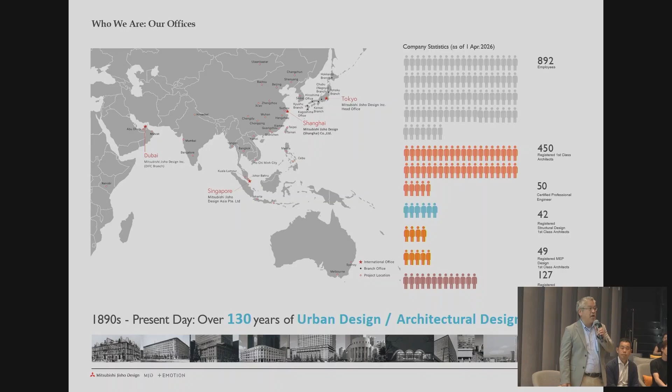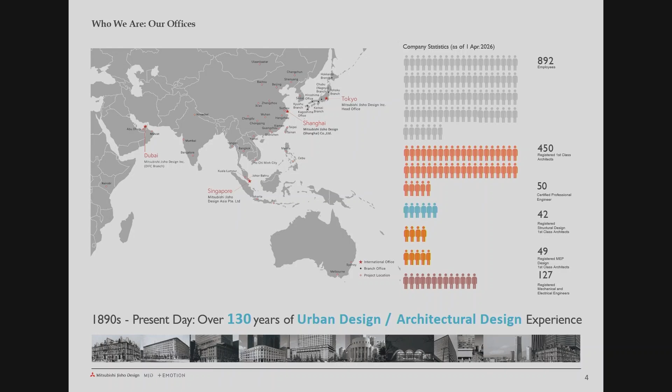And what we do—here are our statistics. We have a little less than 900 staff, and about half are architects. We have all the engineers and consultants, so we do all types of architectural design and engineering design tasks. And these are some of the projects that we do.

We were founded back in the 1890s, more than 130 years ago. As they also mentioned, the area in front of Tokyo Station is called the Marunouchi area, and that's the CBD of Tokyo. Our mother company, Mitsubishi, bought this 120-hectare land to develop the first CBD in Japan. We invited an architect from Britain, since Japan didn't have any architects at that time, and we learned from the British architect to create London-style brick buildings. Then, in the early 1900s, we started building reinforced concrete buildings as well.

There were several phases of redevelopment in the Marunouchi area, and today we are actually working on a tower about 400 meters tall, which is expected to be completed in 2029.

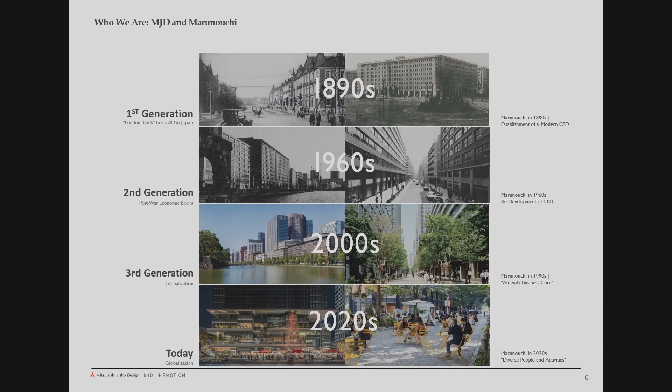So why? It is because we started out as Mitsubishi Jisho Design, one company. We designed brick buildings, reinforced concrete buildings, steel buildings, and all those. But given the current situation of climate change, we are trying to explore other methods to reduce carbon emissions. One of the answers we are seeking is timber structures—the use of wood in buildings. Mr. Hotta will talk about the actual implementation of timber structural design.

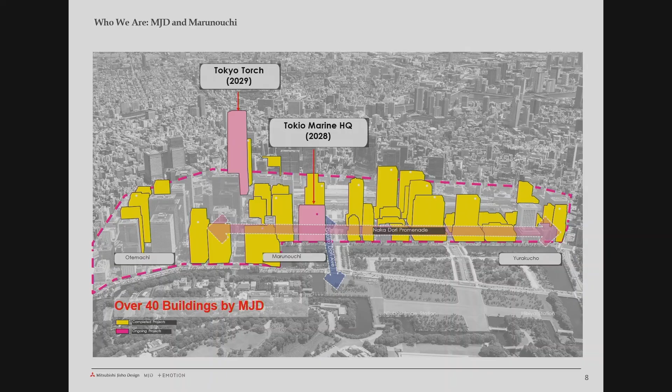That's one of the biggest projects we are working on. On the other hand, Mr. ATSUMI will talk about a smaller scale project, the tea house you see downstairs, looking at the potential of other implementations of wood as a material. Now I'll hand it over to Mr. Hotta for the structural design.

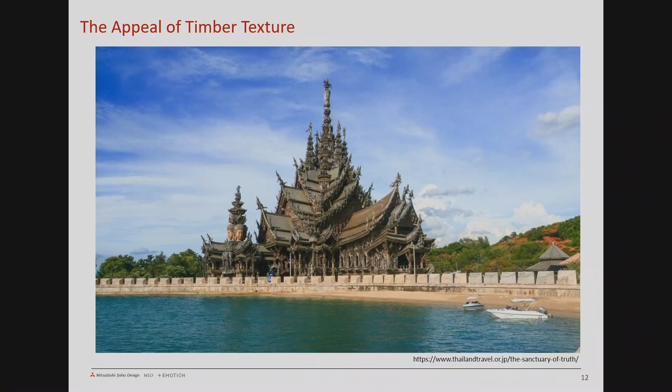For both Thai people and Japanese people, I feel timber is a very familiar material. Looking at Thai traditional buildings, many buildings use timber, and sometimes the timber creates a very artistic appearance.

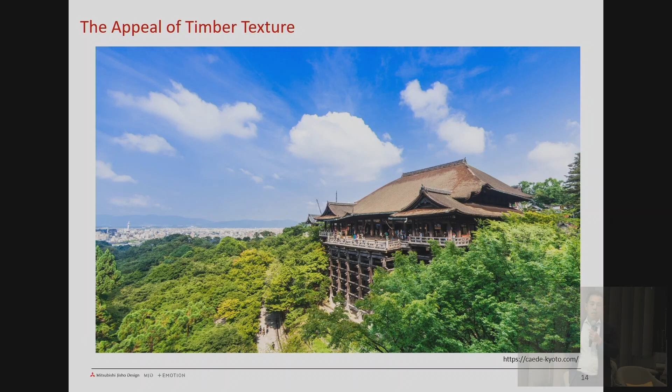I think both Thai people and Japanese people feel timber structures have a heartwarming appearance, and sometimes it's very easy to make an artistic appearance with it.

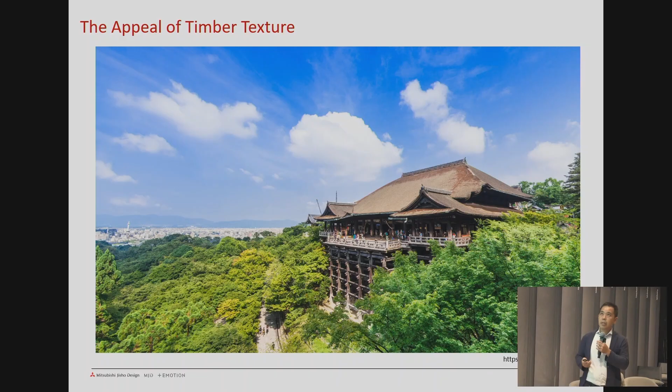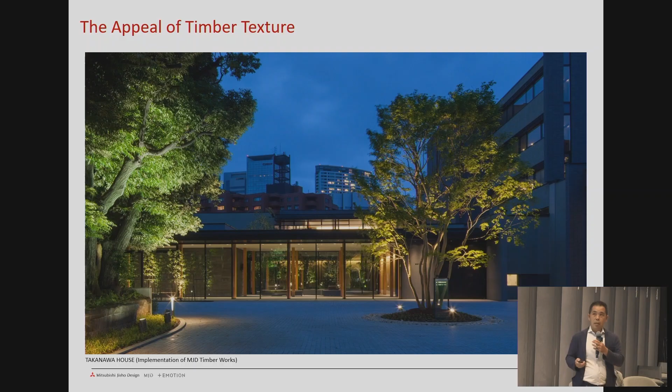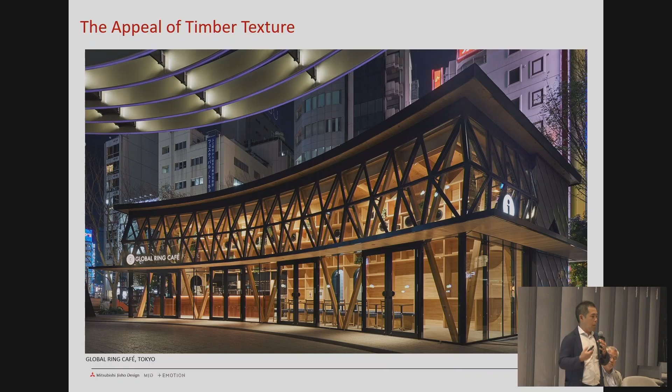Even looking at modern Japanese timber buildings, this is actually my first timber work in my career. This kind of heartwarming or warm appearance and texture is very well accepted by clients. And this is another project we've worked on for more than 10 years. This heartwarming appearance is one of the motivations to adopt timber structure.

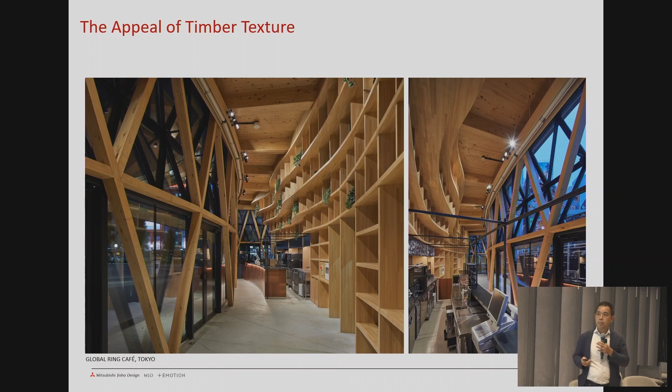This is the interior of a cafe, around 100 square meters, where people enjoy coffee or tea inside, feeling a very mature mood. And this is another one of our projects, collaborating with architect Kengo Kuma.

Even modern timber structure can express a very artistic appearance, as well as traditional sculptural architecture.

But today we would like to think about why timber structure is trending all over the world now. Except for Japanese or Taiwanese people, timber is not always a traditionally familiar material. However, nowadays, all over the world, people are very interested in timber.

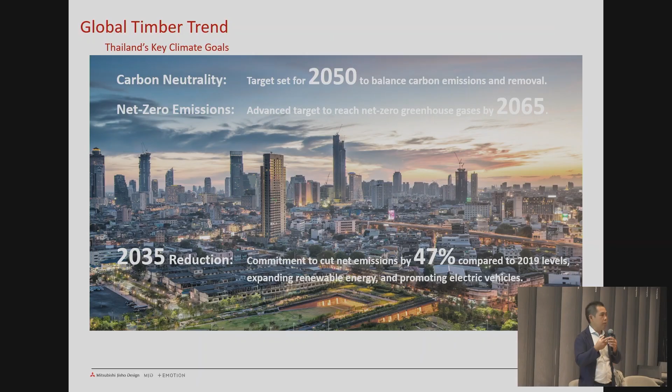One of the reasons is the current trend around timber - for instance, this is Thailand government's goal for the 2050s. All people are now very concerned about global warming, so we need to reduce carbon emissions and prevent further global warming. So we are looking for good materials to construct buildings now.

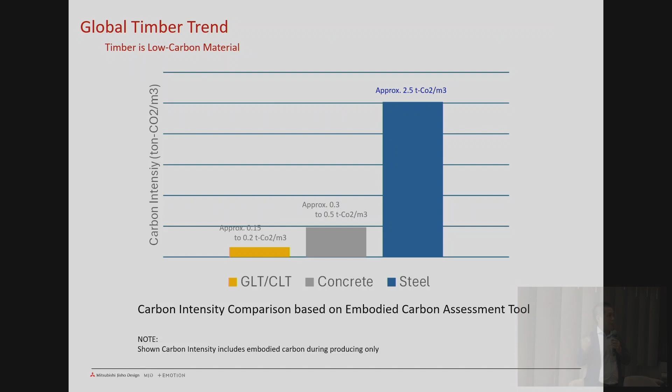Comparing the carbon intensity between timber, concrete, and steel - this is carbon intensity data from a website. Steel exhausts so much carbon during its production. However, timber, even glulam timber or CLT, has much smaller carbon intensity compared to concrete and steel. That's why people are very interested in utilizing timber.

Another aspect is that timber can absorb CO2 in the air during its growing. After 30 or 50 years after planting, trees stop absorbing CO2 and start using oxygen rather than absorbing CO2.

However, that grown timber is shipped to the city and changed into a timber building, and new trees are planted in the forest, creating a sustainable forest. This means the city can stock carbon, and we can create unlimited CO2 absorption in the forest. That's why people are interested in using timber as much as possible.

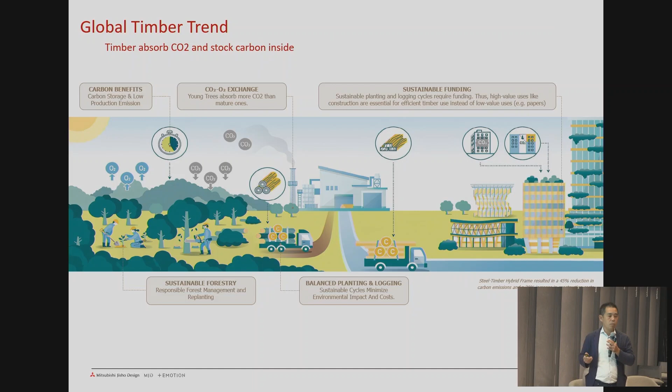But in this scheme, sustainable forest circulation is essential. In any case, based on this concept, for the past 10 to 15 years, people have been very keen on creating timber buildings as big as possible.

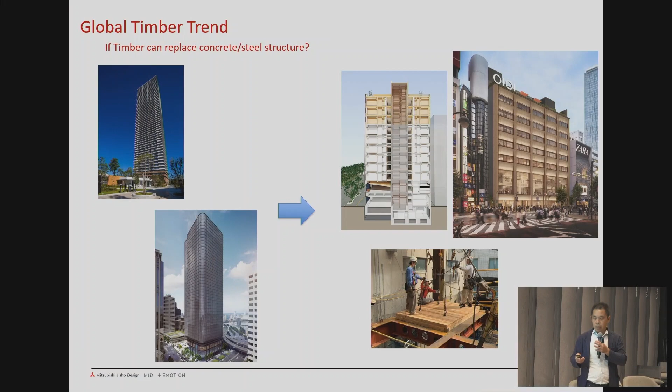Previously, all buildings were constructed using concrete or steel, but by trying to replace concrete or steel with timber, we can reduce carbon emissions in the city. This kind of motivation has created a mass timber competition all over the world.

A few years ago, I created a ranking of tall timber buildings in the world. Currently the tallest mass timber building reaches approximately 200 meters tall, which is a project in Australia, a concrete-timber hybrid structure. Some mass timber projects are provided by our company.

I'm now working on one under construction, a steel-timber hybrid structure, expected to be the tallest timber-steel hybrid structure in Japan when completed. Anyway, this kind of seeking for green materials is inviting this mass timber competition.

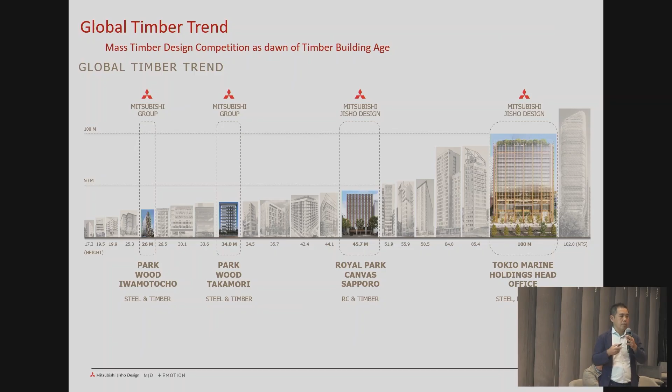And currently, there are so many tall timber buildings in the world.

When we design this kind of mass timber structure, there are three topics to discuss. The first is how we maintain structural stability. Timber is a combustible material, so how do we maintain fire safety under fire. Also, timber is an organic material, so after construction it starts to decay - how do we maintain the quality of the timber? That is the durability and maintenance regime issue.

For structural stability, recently this kind of engineered wood has been well developed. For instance, CLT (cross-laminated timber), glulam timber, or laminated veneer lumbers can provide very strong material properties. This material development makes tall mass timber buildings possible. So in order to maintain structural stability, we positively use this engineered wood. That is the solution of the recent trend.

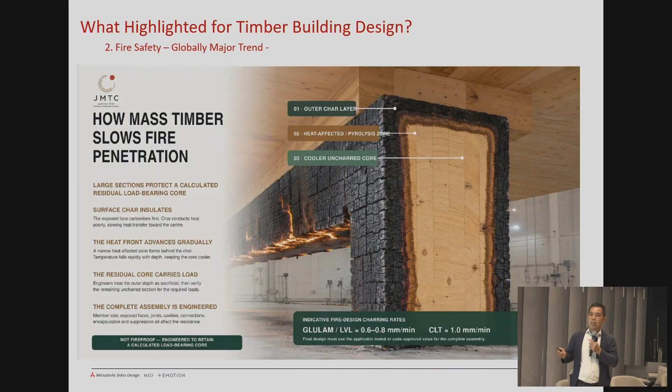For the second issue, fire safety - even though timber gets ignited by fire, it's very hard to keep burning. Once timber gets a char layer, the heat release rate decreases. So considering this char layer and maintaining the fine section until firefighters extinguish the fire, the building can keep its stability. This is an international trend considering char layer design, and most timber high-rise projects accept this kind of char layer design when creating mass timber projects.

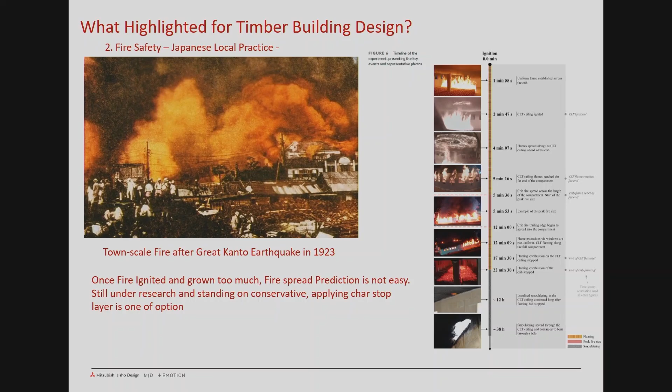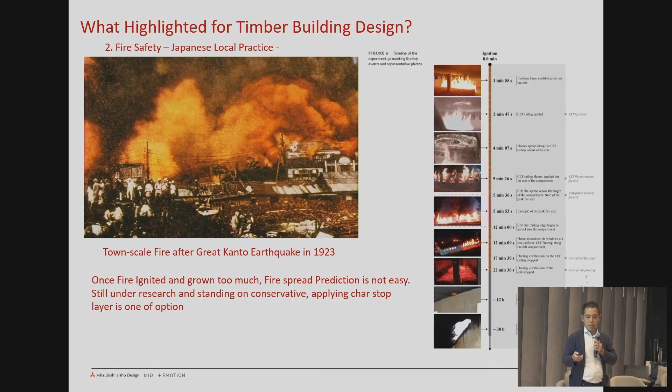Also, when the timber volume exceeds some limit, the growth of fire is very fast. So for the near future, maybe we need to take care of fire safety more, and some additional research or development would be required for fire safety. However, we also need to think about this kind of large fire.

For that issue, a Japanese timber manufacturer is developing a new kind of fireproofing wood. Adopting this fireproofing wood could be one of the solutions for mass timber. The component of the fireproofing wood is a structural section surrounded by plasterboard, with another finish layer applied on the plasterboard. Even though under fire this layer burns out, the plasterboard can stop the development of the fire. Then after 2 hours of heating, the inside is 100% fine.

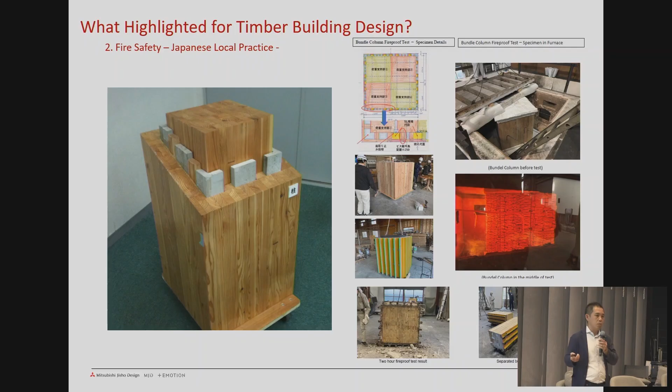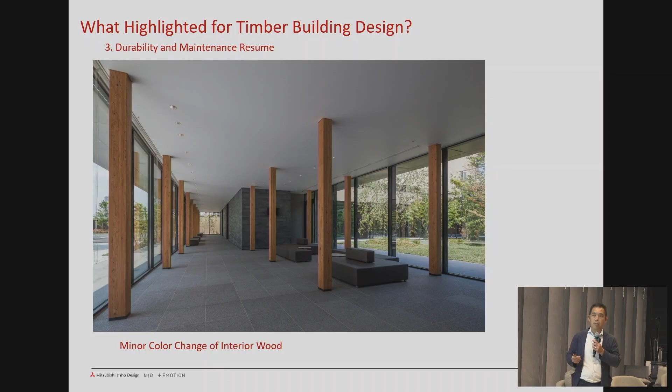Fire safety still needs further discussion. However, depending on the situation of the building and the timber volumes, we already have some solutions. As for durability, as far as timber is inside the building - this is our project, and the picture is taken 10 years after building completion - there is minor color change and no cracking. So as far as timber is used inside the building, we don't need to be too concerned.

However, once timber is exposed to the outside, meaning getting rain or strong sunshine, it easily changes color and sometimes cracks. So if we design a mass timber building in Thailand, we also need to take care of this durability issue. But so far, thanks to the trend of mass timber construction, this research is well developed and a lot of know-how has been accumulated around the world.

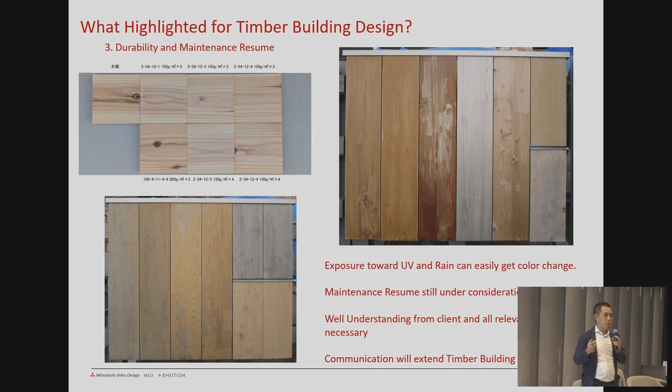Based on this new knowledge, I would like to introduce one mass timber project in Japan. The project introduced today is a mass timber building 100 meters tall, expected to be the tallest in Japan. This building is for an insurance company's headquarters, facing the Imperial Palace and located just in front of Tokyo Station. Currently, the timber erection has just started and it's expected to be completed in 2028.

This building's typical floor plan has a 12-meter distance between columns, with a maximum of 16.4 meters between columns. The overall plan shape is 80 meters by 80 meters, with a patio at the center of the plan.

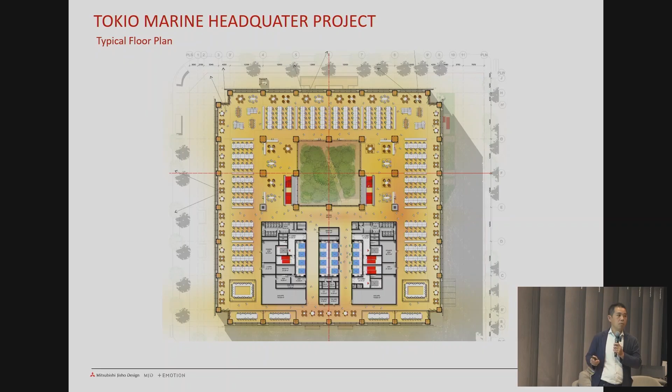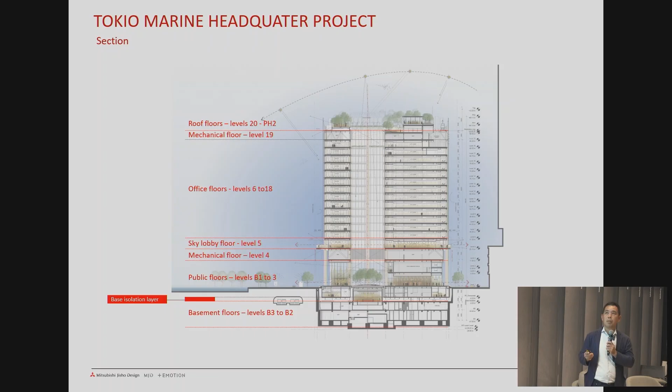The building height is 100 meters above grade with 20 stories. The occupancy is mainly the headquarters of an insurance company, with offices located from level 6 through level 18. Timber is adapted for the columns and some ceilings, with timber columns located above level 6, and CLT appearing as ceiling at the perimeter of the typical floor from level 6 to level 18.

For a typical floor, we have 52 columns. However, 40 of the 52 columns are designed using timber. So timber is carrying very heavy gravity load during the building's lifetime, and we needed to figure out how to maintain structural stability over that time.

This was to figure out the section size of the timber columns. We ran some structural tests, measuring the strength and behavior, and finally reached a design for these columns with 900 by 900 square millimeters to a maximum of 2060 by 2060 square millimeters.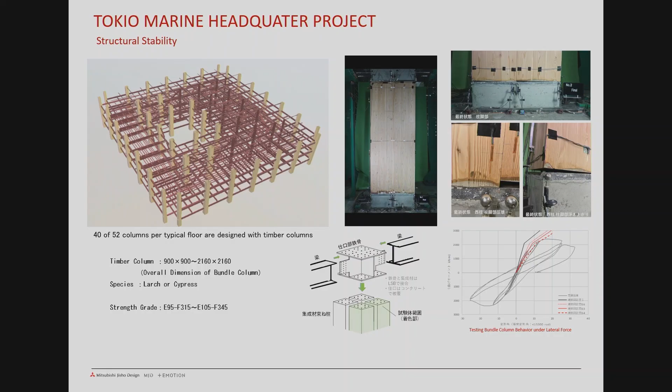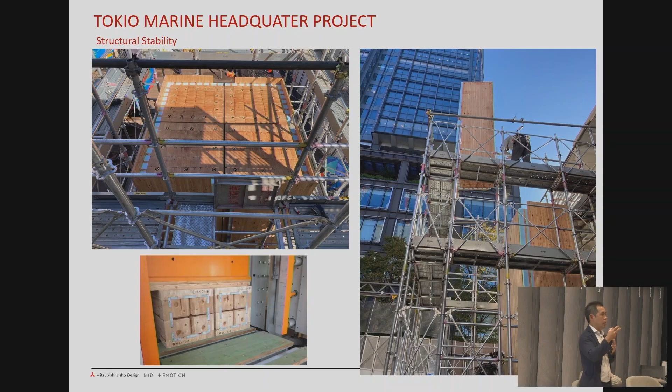However, when the timber section is over 1 meter by 1 meter, it's very hard to produce. So the timber column is actually divided into 4 pieces and bundled on site, like this. Each column piece has this size, so bundling 4 columns into 1 achieves a column of over 2 meters by 2 meters square.

The second issue is fire safety. For this, we also tested some fire igniting tests, expecting a sprinkler effect. The CLT is located at the perimeter of the buildings, but keeping the high ceiling height and testing the sprinkler effect, we confirmed safety during people's evacuation.

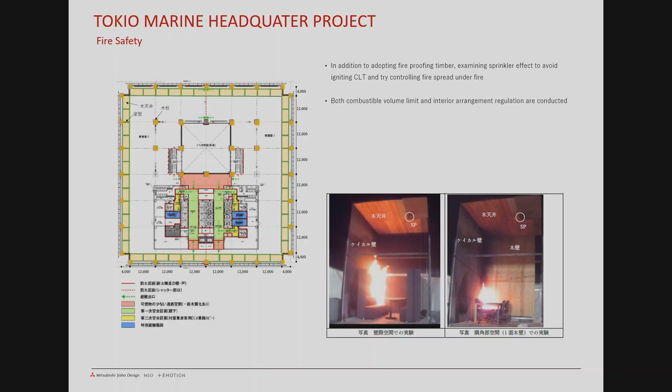Based on our calculation, people on this floor can egress from the floor in no more than 6 minutes. During those 6 minutes, we prevent the fire from reaching the ceiling, even though we have combustible walls or columns located nearby the ceilings.

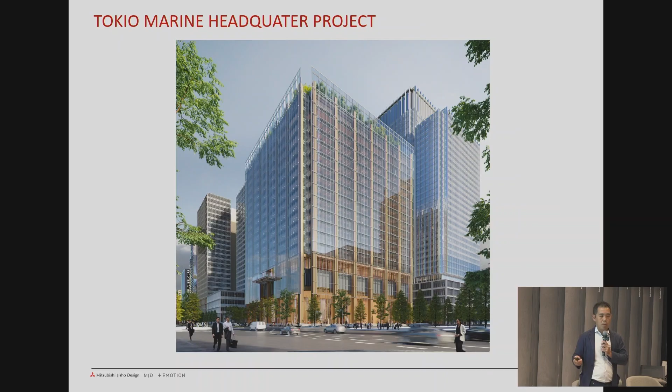As for durability, as you can see in this rendering, some timber is exposed to the air. But this is a very strong design concept provided by architect Renzo Piano. So we thought about how to keep this appearance during the building's lifetime, and the conclusion is...

We provide them some detachable cladding layer. So during the building lifetime, the structural timber is covered with a timber clad, and we also tested some treatment for this timber clad. However, even if this protective layer is decayed, we can replace the clad and change it to a new one, keeping the appearance if the client requires.

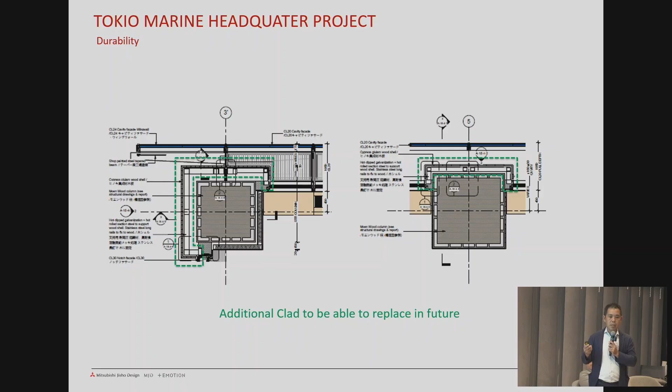But anyway, designing with mass timber is kind of the trend now. However, to design mass timber buildings, we have some issues to solve, and in any case, we have some solutions, as I introduced today. Finally, the building shows this kind of interior.

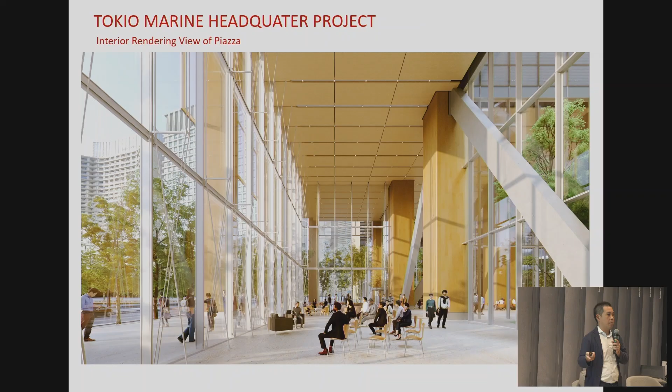So far, I feel the first trend of mass timber is almost terminated, and many engineers and architects are moving on to the next steps. The phase one challenge was how big or how attractive a timber structure we could design. However, the initial concept to adopt timber was about how we design ecological buildings.

So this is some quick calculation of the embodied carbon, comparing a pure steel structure assumption to a timber-steel hybrid assumption. As you can see, this is the embodied carbon per square meter for the Tokio Marine project. The higher the building goes, the efficiency slightly changes.

The lower one is a mid-rise timber-steel hybrid building for commercial buildings. For these buildings, assuming a pure steel structure, the structure shows around 550 kilogram CO2 per square meter. Then some steel columns and steel beams are replaced by timber, and the overall embodied carbon is reduced to 430, showing a 20% embodied carbon reduction.

However, when the building scale is larger, we gave up adopting timber beams, so in this case only a 7% embodied carbon reduction is provided. For future timber structures, we need to find out what is the appropriate planning and appropriate scale to adopt mass timber.

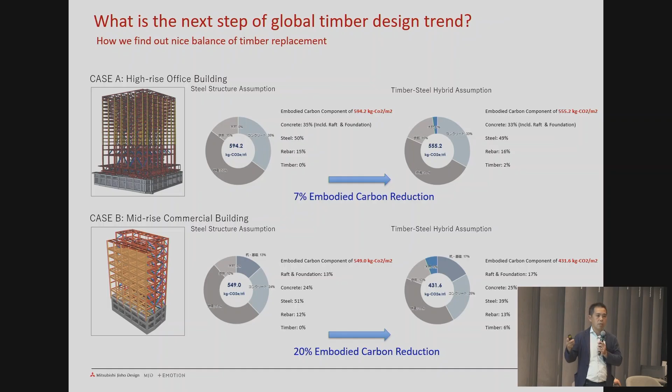So I think maybe by 2028, 2029, many mass timber tall buildings will be showcased in the world. However, for the next 10 years, maybe some scales will be slightly smaller, or the structural system will be more sophisticated, considering this kind of calculation.

Also, talking about embodied carbon, using timber is just working for this portion, a very early stage of whole life carbon. Whole life carbon is divided into three phases: the upfront carbon phase, which is the constructing phase; the second phase is the building lifetime, where air conditioning efficiency or sunshade efficiency works; and finally, the building gets to the demolition phase. How we reuse or recycle the material is the last phase of whole life carbon. So far, phase one is just looking at this upfront carbon phase.

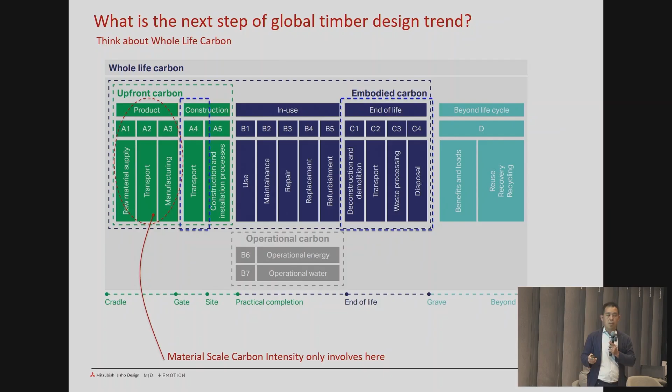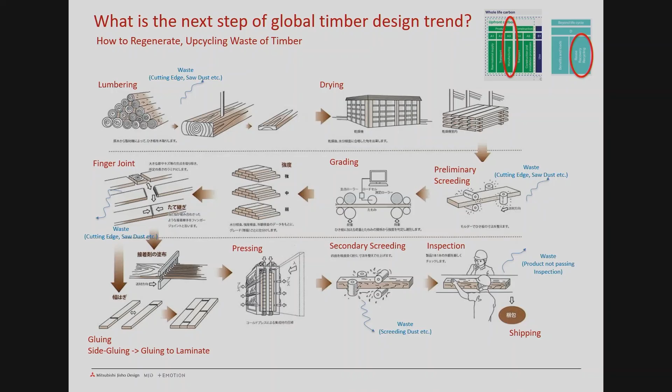Even in the upfront carbon phase, we still have room to discuss. One is we need to think about the producing process once again. This chart describes the production of CLT or glulam timbers. Production starts with lumbering, cutting into laminar, drying, preliminary screeding, and gluing, and after gluing, secondary screeding is applied. During this process, we have so much waste, such as sawdust or cutting edges. Currently this waste is sometimes used as fuel for the drying process. However, I think we have more room to use this kind of waste more efficiently.

So the next presenter, Mr. Atsumi, will provide some possibilities for how we reuse this kind of waste. However, for the next step, we need to rethink and relook at this kind of producing process as well.

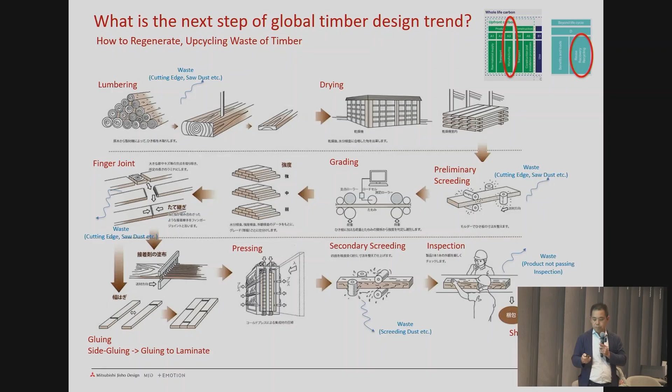Also, the transporting process at the upfront carbon phase—there might be room to optimize. Currently, if we have a timber project in Thailand, Thailand unfortunately doesn't have a structural timber manufacturer, so the major timber market is in Europe or Canada. If we get timber from these regions, it's shipped over a very long distance because timber has so much volume it cannot ride on an airplane, so we just use bulk ships, and the ship sails a long distance. So we need to think about minimizing this kind of transportation.

Actually, I'm from Japan, so I would like to appeal to the Japanese possibility. If timber is imported from Japan, compare the distance between these two—which one is more efficient? The answer is maybe very clear. But anyway, for the next step, we need to think about circulation and transportation as well as how we use timber efficiently.

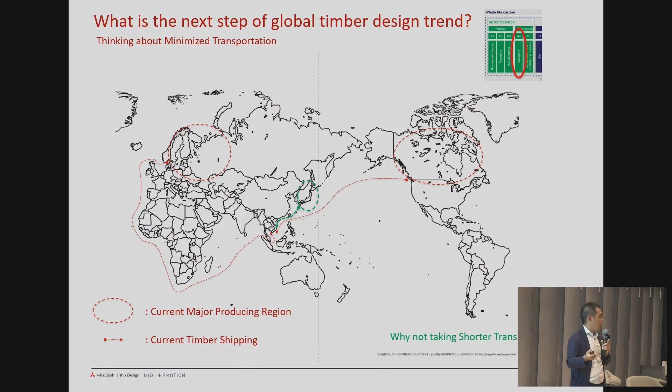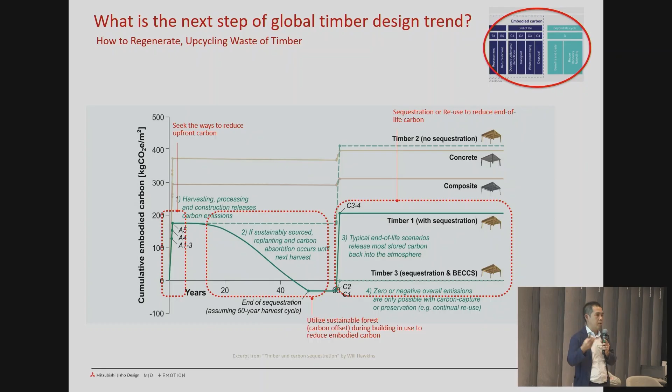At the final phase of whole life carbon, as I mentioned, we need to think about how we demolish the timber. Using the same section and the same timber for the next building is one of the options. However, even though the timber is cut and made into chips, there might be ideas to reuse that kind of chip, waste, or demolished timber.

For small circulations, currently timber is a global boom, and Canada, Europe, and Japan are major timber markets. However, minimized circulation is very important. So for young engineers or young people, I would like to say: look at local materials. For instance, rubber trees are currently not used for structural timber because of weakness or some disadvantage. However, idea can conquer that kind of issue, and idea and thinking can provide any idea to create new products.

So as for the closing of my presentation, I would like to say phase one booming is almost terminated, and now new ideas are very welcome in the timber design market. Thank you very much.

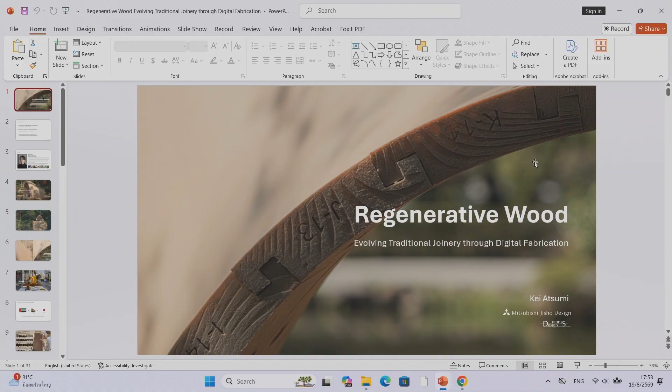From now, I'm going to talk about using wood waste for 3D printing. Thank you for coming here today. I'm Atsumi from Mitsubishi Jisho Design, and today's title is Regenerative Wood: Evolving Traditional Joinery Through Digital Fabrication.

Today there are three key themes. First is wood waste as a new architectural material—how are we going to utilize wood waste for 3D printing? Then, traditional joinery meets digital fabrication—we can learn from traditional joinery for new technology utilization. And finally, it's for regenerative wood architecture—how we create a circular model or upcycling model for upcoming emerging tech architecture.

Quickly about my profile, I'm Atsumi, architect and creative director of Mitsubishi Jisho Design. Before joining Mitsubishi Jisho Design, I worked at Bjarke Ingels Group in Copenhagen, people call it BIG. After that, I worked at the Sou Fujimoto Atelier in Paris, and then I joined Mitsubishi Jisho Design. My work is mainly design strategy for architecture and urban design, research on materials, and many R&D projects as well.

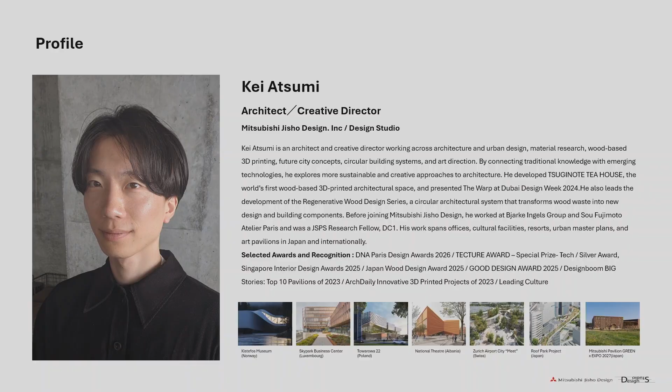Firstly, I'd like to introduce the Tsuginote Tea House. You probably already saw this tea house downstairs. I'm the designer of this Tsuginote Tea House, and it was the first wood 3D printed architecture in the world. As you can see, this structure was made by a desktop 3D printer, not a huge architecture-scale 3D printer. So anyone can actually create this if you have a 3D printer at home. All the material is made from wood waste.

I wanted to put this first artwork, the Tsuginote Tea House, in a very traditional Japanese environment and nature, because I wanted to create a kind of contrast between innovation and tradition.

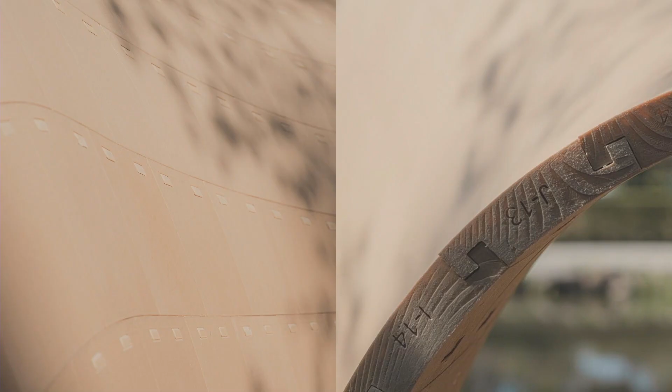As you can see, this organic curved envelope was created from many different components. All the panels are 3D printed, all double curved, and have very complicated Japanese joinery, all assembled together in one piece. We didn't hide the panel joinery, because the joint itself is actually a very important aspect of this artwork.

All the panels have an ID number. For example, this one is J13. So when you want to assemble all the 3D printed panels, you just need to follow the numbers, and by doing so, you can complete this envelope in a 2 hour construction.

Another example is what we call Warp. We designed, produced, and constructed it for Dubai Design Week 2024. This is much more complicated than the Tsuginote Tea House. We created a much more efficient and clear production workflow for the future utilization of 3D printing in architecture.

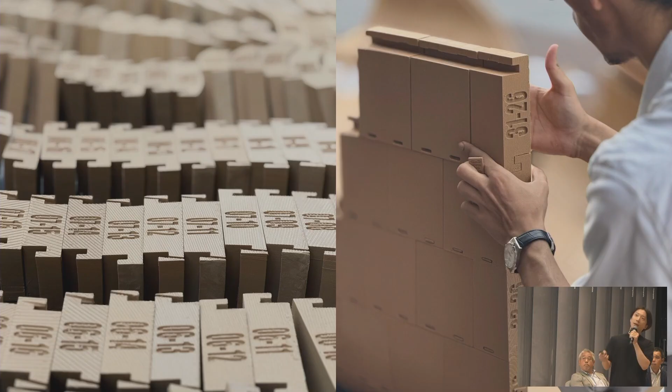As you can see, all the components are 3D printed, each with a different shape, and each component has an ID number. We could construct the Warp tea house in 10 hours, with around 10 people working outside.

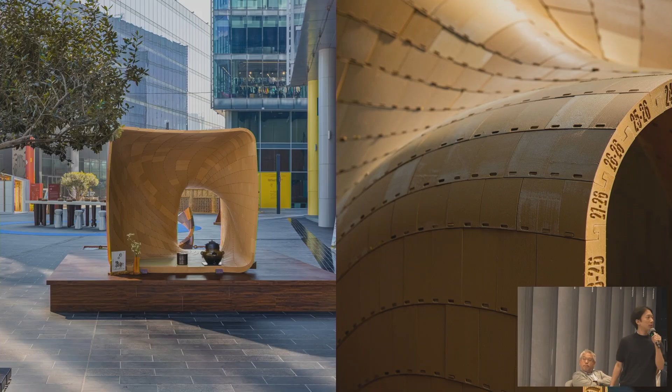So this is the result of Warp. This envelope is very complicated, yet sometimes smooth with a double curved design surface, all made from desktop 3D printed wood panels, joined by traditional Japanese joinery, and controlled and managed by computational design. As you can see, this is the ID number. Again, in the UAE, without any problem, we could collaborate for the on-site construction.

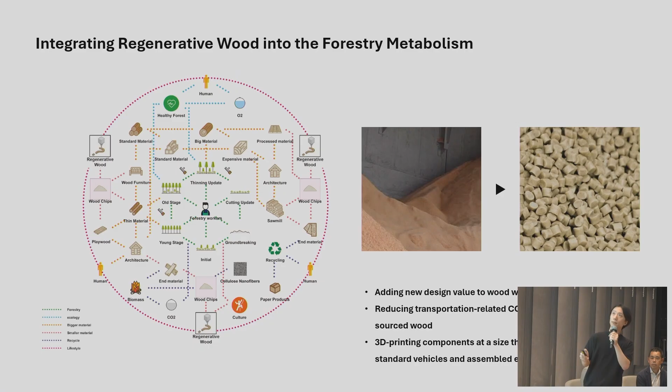When you look at the forest circulation, every time we create timber or any wood furniture or wood products, we always create wood waste, which is wood powder or small pieces of wood waste. We want to give market value to this waste by using design or emerging technology.

So we utilize wood waste and turn it into wood pellets for the 3D printing material. In a way, we turn wood waste into valuable building parts.

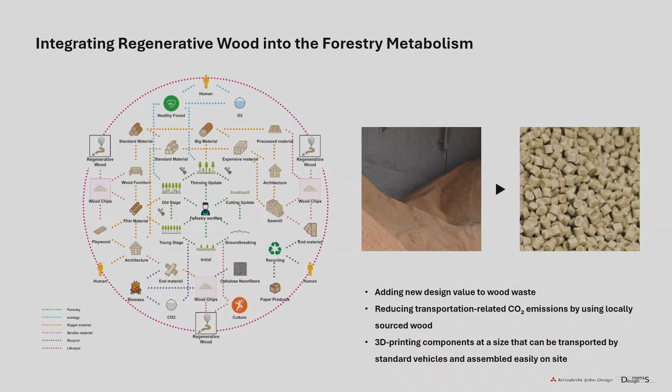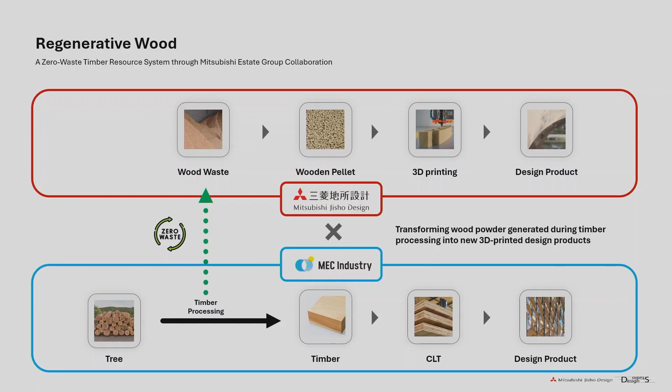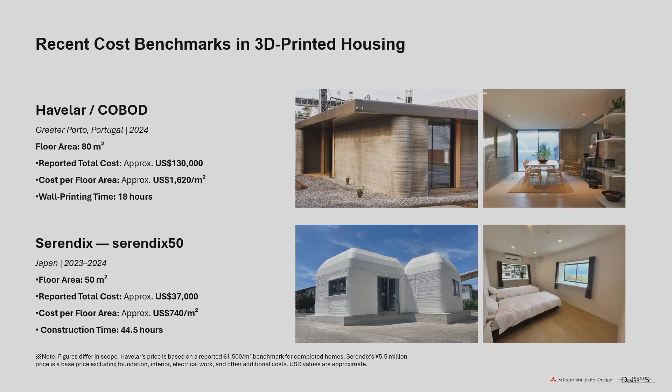This is why the construction cost is very low. So the good point of 3D printing technology is we can reduce cost, construction time, and labor costs. We can also reuse and recycle the material, so it can be very eco-friendly, and we can easily create complex geometries without any formwork.

But most importantly, 3D printing is a very accessible fabrication technology. For example, with desktop 3D printers, a small studio, workshop, or even a student can use a 3D printer nowadays. This accessibility is very important for the future of architecture production through digital fabrication.

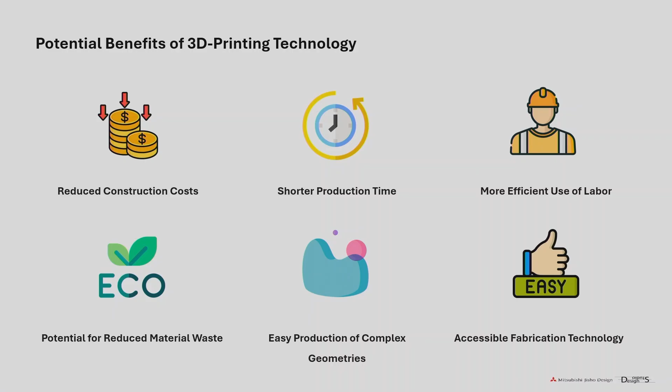So we actually took the completely opposite method compared to what we can see in the world. You can see many examples on the internet of companies trying to use 3D printers the same size as a house—large scale 3D printers producing large scale architecture using concrete material.

On the other hand, our regenerative wood technique uses very small 3D printers, but many of them, producing many small components that are just assembled together by a traditional joinery system.

Large scale 3D printers also have some limitations. The concrete large scale 3D printer you see on the internet is very powerful, a strong production system, but the layer height is very thick, so if you want to create very fine detail of architecture, it's very difficult to achieve. Also, this huge 3D printer itself is very expensive, so there is limited access if you want to use it.

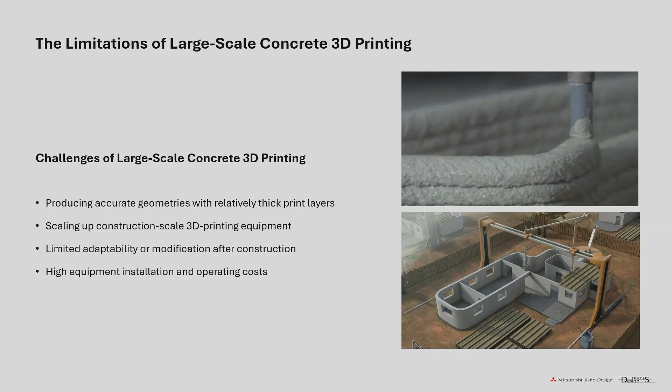At the same time, after construction, if you want to change some layout or walls, or do maintenance and change the layout of the housing, it will be very difficult because all the structure is entirely connected.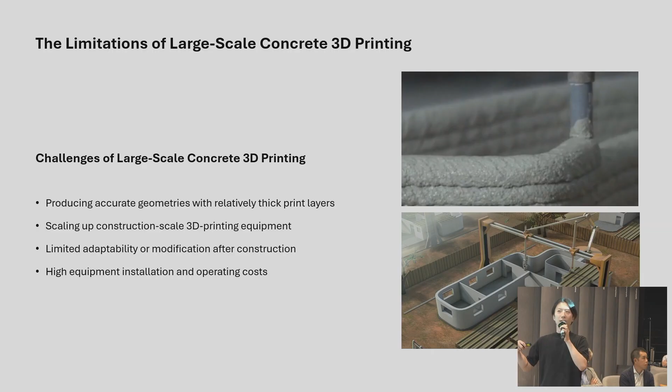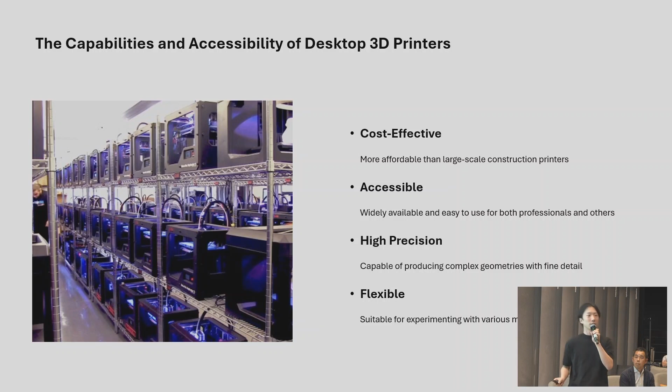But desktop 3D printers have completely opposite characteristics compared to large-scale 3D printers—very cost-effective, accessible, and precise, and also very flexible in terms of shape and material. So we came up with this idea: what if we could use many small 3D printers to produce architectural scale projects, instead of large-scale 3D printers?

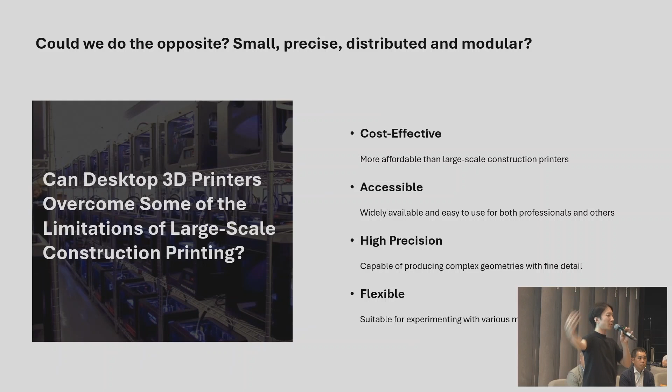So when you create many small-scale architecture parts and components with small-scale 3D printers, how are you going to create a big-scale architecture? You need to combine them together, joining small pieces into a big-scale envelope. This is why we came up with this idea of Japanese wood joinery.

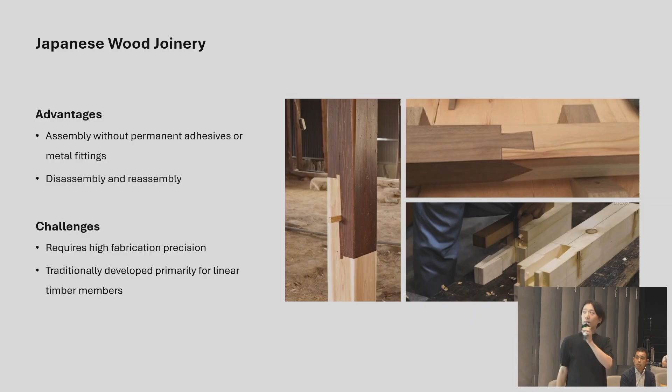Japanese wood joinery systems, in general, were used for traditional temples or housing back in the old days, always for linear or straight structures like columns or beams. But with 3D printing, we can actually utilize this complicated joinery geometry on double-curved panel components without any problem.

If you wanted to create complicated geometry on a double curved surface by hand, it would take like a year for each panel. But 3D printers don't complain, and they work 24/7 every day. This is why we could create more than around 1,000 different shapes of panels for the Dubai Design Week.

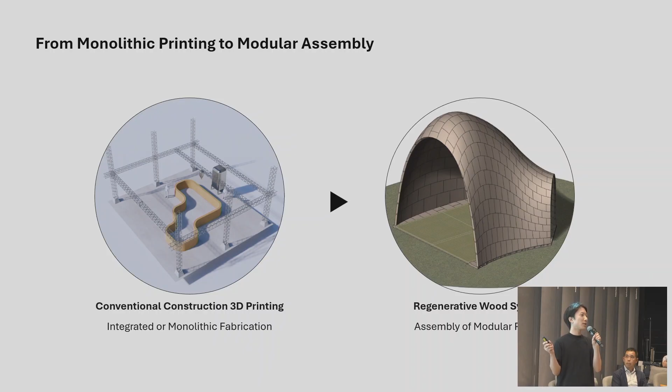Because all the panel components have different shapes, we needed to give each one a number for easy construction. This is why computational design was very important. We established an entire workflow to control all the different components and give an ID number to each one for 3D printing production.

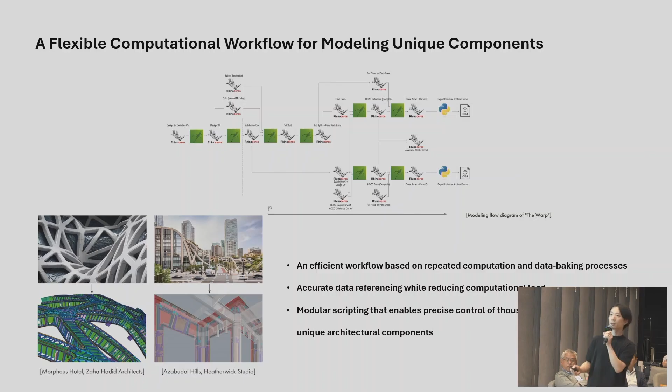In the end, we fabricated about 3,000 different shaped components, including about 988 panel components and 1,938 joint components. This is the 3D model of all the components, and this is the assembly process we carried out at Dubai Design Week.

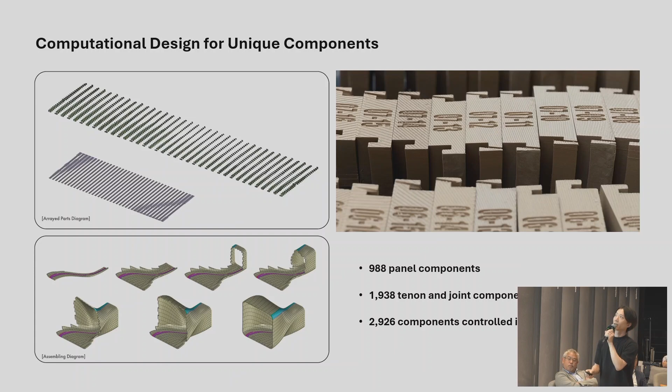So this is a design to assembly workflow, what we did for the Dubai Design Week. Firstly, we design a nice design surface in Rhinoceros, a 3D modeling software. And then we give input to the Grasshopper.

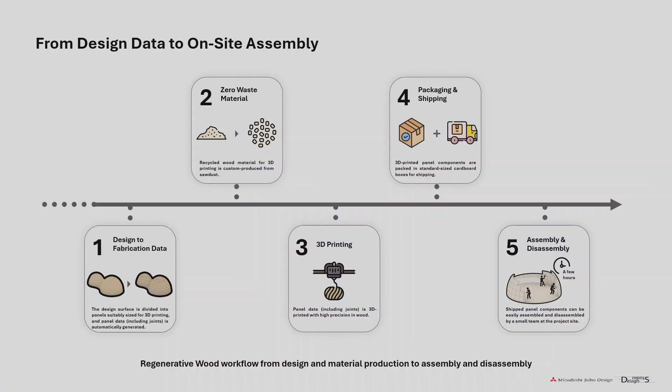This Grasshopper will automatically divide printable panels and also automatically create Japanese joinery at the edge of the panel. It will control, manage, and give ID numbers automatically to the panels. Then wood waste will be the material and we 3D print.

Because we use desktop 3D printers, we can put them in the standard shipping box, and then we send them to the UAE from Japan. Then a small team could construct it in a few hours.

It's very easy because they just need to follow the numbers. They don't need any special skill for the construction. So it's more like a Japanese Lego system in a way.

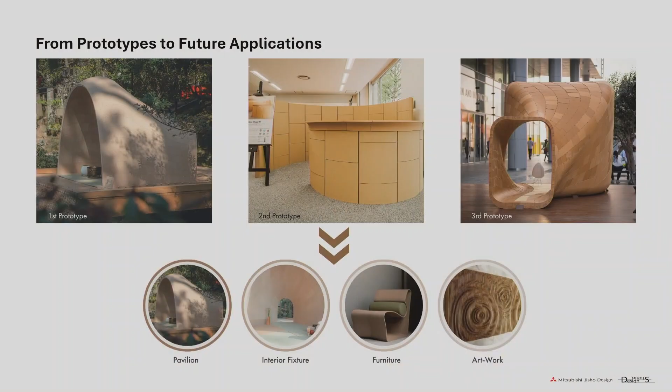We've experienced several prototypes and we are looking forward to expanding this technique, regenerative wood, for pavilions, architecture, interiors, furniture, and artwork as well.

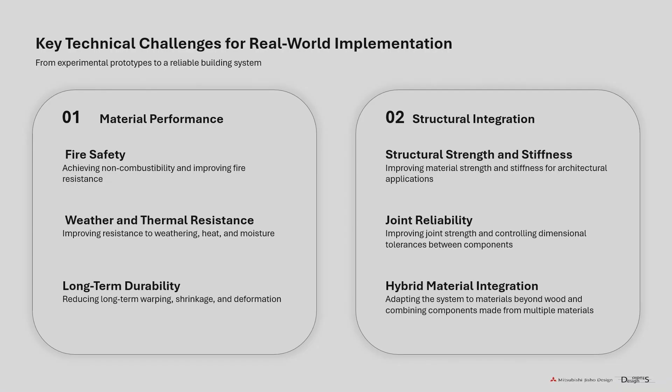But to implement a real-world architecture project, there are some challenges. We need to ensure better fire safety, weather and thermal resistance, and long-term durability as well. We also need stronger structures, stronger panels, and stronger joinery.

We also need to think about how to integrate with different materials, like glass, steel, concrete, and any kind of insulation—familiar architecture materials.

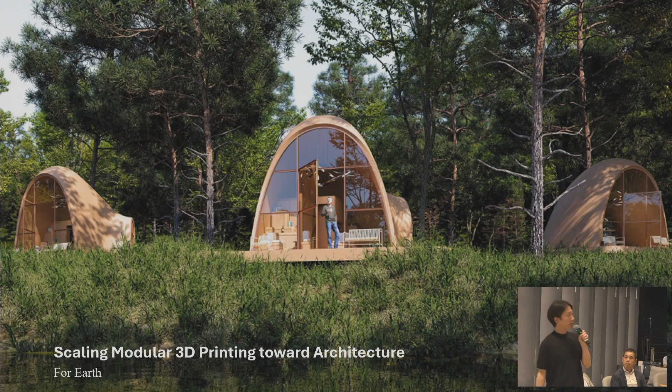This is what we're looking for in the future. We're looking to create and utilize this 3D printing regenerative wood system for real housing projects as well. We would like to reach integration of different materials—wood 3D printed components, glass, insulation, and concrete for the floors.

We're also looking at Mars projects. Again, if you want to do construction, bringing a large 3D printer to Mars is very unrealistic—how would you even bring a large-scale 3D printer there?

But if we use small-scale fabrication machines and local material, then combine those components by robots—because humans cannot construct due to gravity or harsh environments, but robots and small machines can create our habitat on Mars in the future.

So this is why this regenerative wood 3D printing system has so much potential for Mars projects as well.

As a final note, these are the 3 key takeaways from today. Waste can become resources by using upcoming emerging tech. And tradition as a design logic—we can learn, utilize, and steal traditional knowledge by combining design and fabrication.

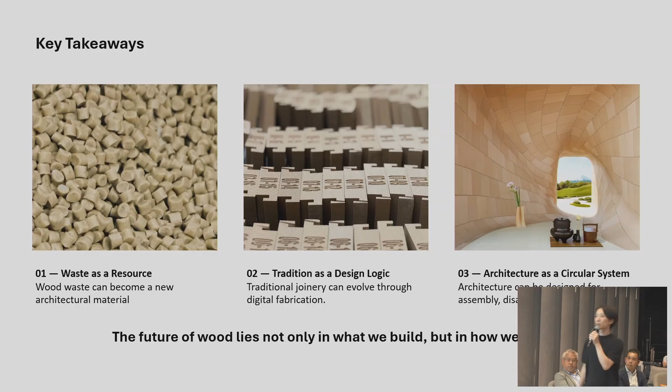So I think the future of wood lies not only in what we build, but in how we build it. Thank you.

So now I got inspired to make my own timber house and put the tea house inside of it.

And for this project, would it bear the load of the weight of the material as well? Or is the joinery just used for assembly and disassembly—do they carry the load? Of course, maybe a joinery itself carries the load, but this 3D printing panel itself is very lightweight, extremely lightweight. This is why mainly this joinery keeps the joint between the panels.